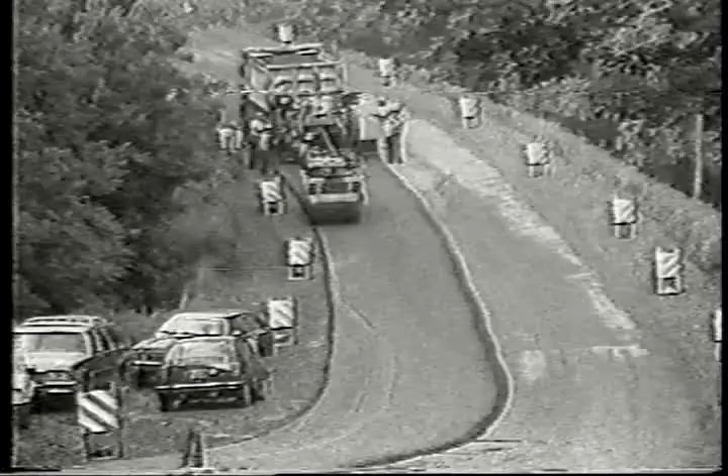In this program, I'll discuss two topics. One, the preliminary checks you'll have to make, and two, the equipment that's being used. In Part 2, I'll discuss preparing the area and tack coat operations. And Part 3 covers delivery of the hot mix, paving, compacting, constructing transverse joints, and acceptance tests.

There's one point I want to make right away. As with any other job, if it can't be done safely, don't do it at all. Watch for potential safety problems, and if you see one, get it corrected. Stop the work if necessary.

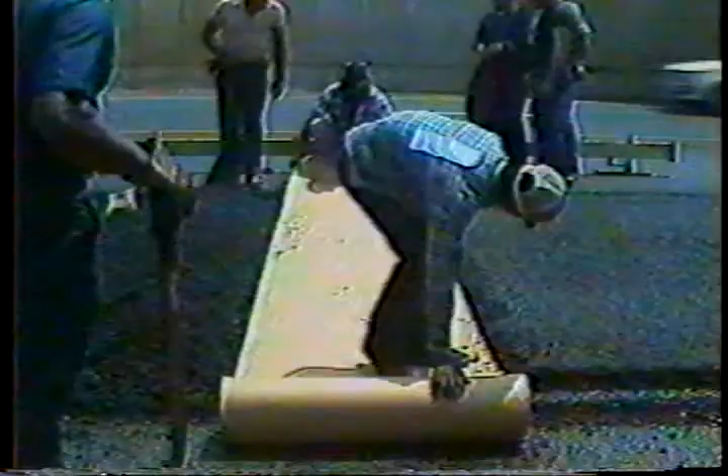Okay, let's get started. Preliminary checks. On any construction project, the quality is determined by three things: the materials, the equipment, and the work methods. Poor quality in any of these categories means a poor construction job. So really there's a fourth element at work here, the inspector. You have to know the materials, the equipment, and the work methods.

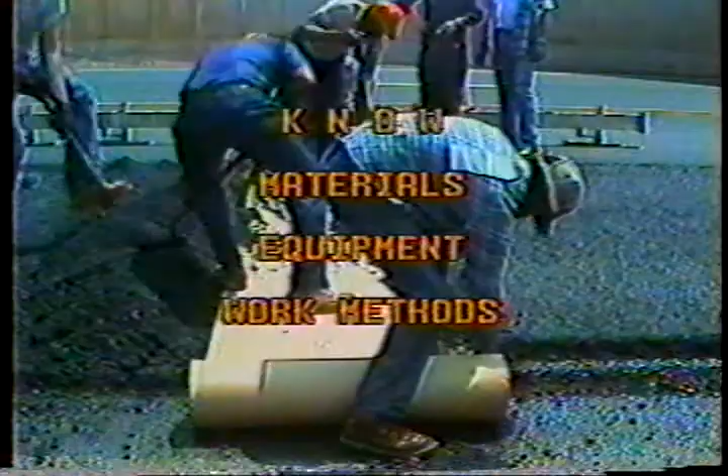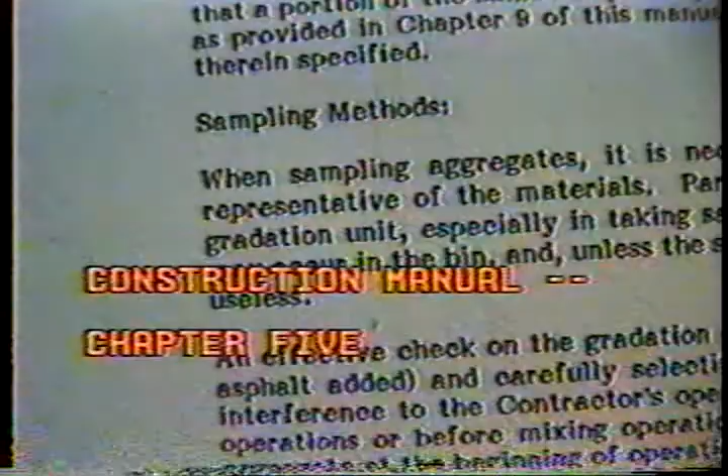For the most part, the work you'll inspect will be based on Section 5-04 of the standard specifications. Get a copy of the plans and the specs and read Chapter 5 of the construction manual. If you have any questions, ask your supervisor. It's better to get your questions answered beforehand rather than have the contractor ask you a question that you can't answer.

But the specs don't cover everything. There are always exceptions. So before any work begins, review the contract, including any special provisions and supplemental specs. Know each job before it begins. That's the only way to be fully prepared to do a good, thorough inspection.

Make sure everything's been approved: the material sources, the materials themselves, and the hot mix plant. That means, first of all, to make sure that all of the details have been covered in the pre-paving meeting between the contractor and the department. As for the material and the plant, you'll need to make sure that the job mix design is approved and the plant is approved according to the department's asphalt plant inspection checklist. I'll be talking more about the materials and work methods later on.

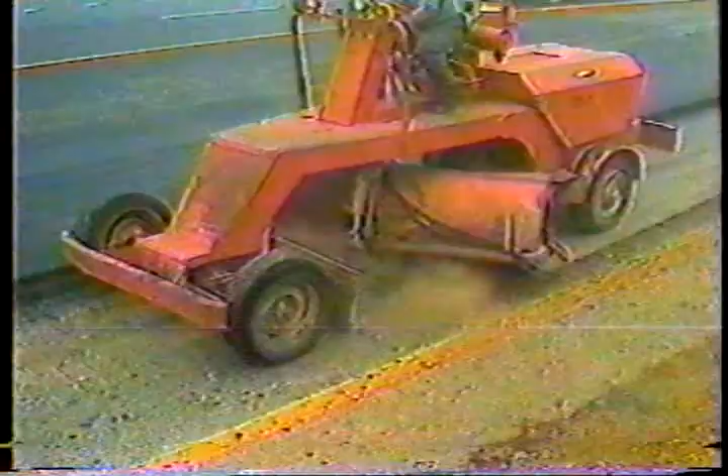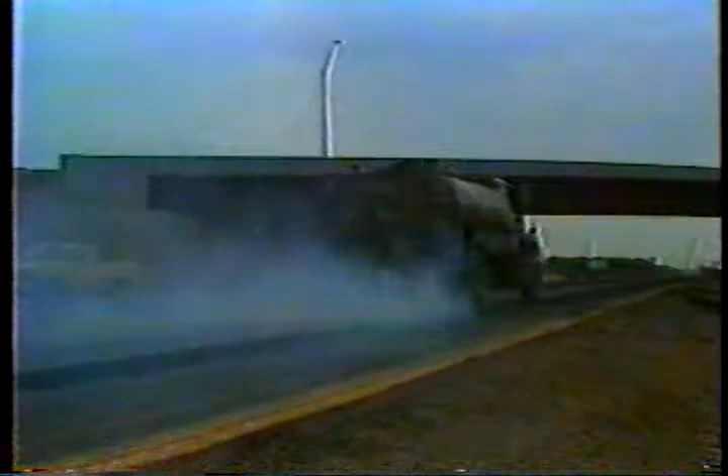Right now, I want to show you the equipment. The paving operation starts with some minor housekeeping. Power brooms and blowers to clean off the old pavement. A distributor applies a uniform coat of liquid bituminous material. There are haul trucks to bring the hot mix to the work site.

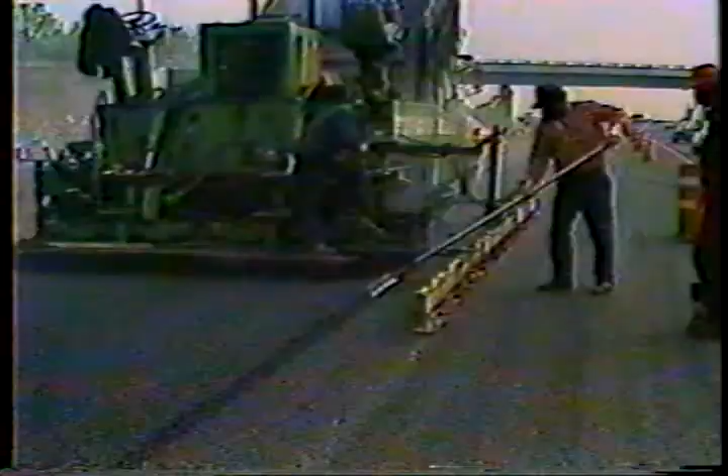And of course, the paver spreads the mix over the roadway, followed by rollers to compact it. And there are some miscellaneous hand tools, tampers, lutes, shovels, and so on. Let's look a bit more closely, starting with the distributor.

Distributors are really simple in some ways, and they're complicated in others. Basically, a distributor is just a storage tank on a truck with a pump and a spray bar that applies the oil, or it can be applied with a hand hose. You're most concerned with these points: the temperature of the bituminous material, the amount of oil being applied, and the coverage. It must be uniform.

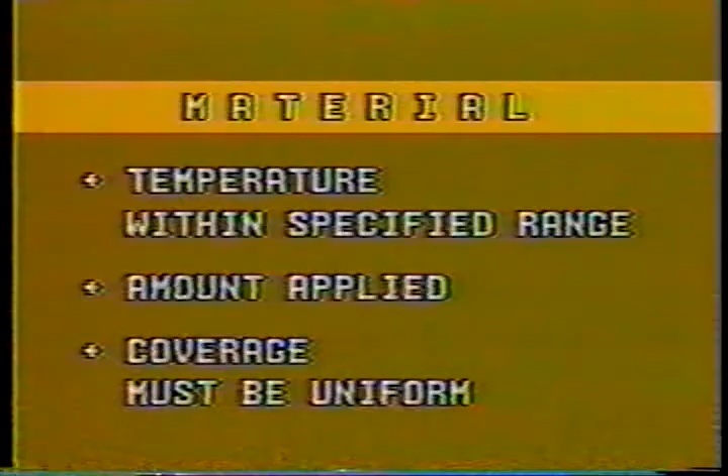The temperature of the oil has to be within a specified range, depending on the type of oil. The required temperature for each type is listed in the specs, so check the temperature in the book. And check the temperature in the tank. All distributors have a built-in thermometer, either on the top of the tank or in the side.

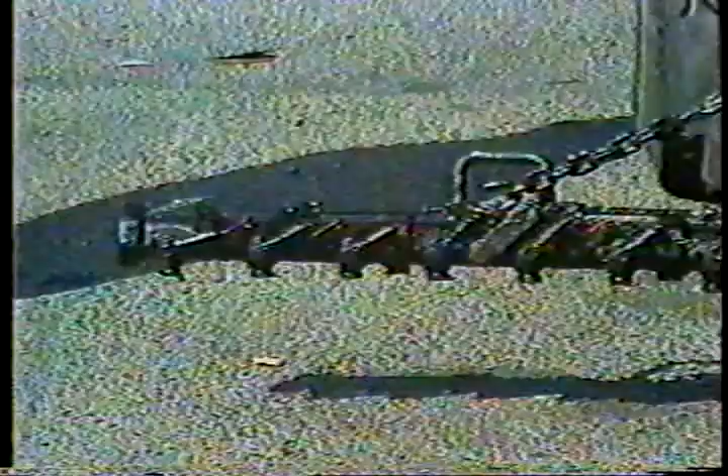In paving operations, the temperature has to be within the range listed in the specs. If it's below the range, get it heated. If it's above the range, reject it. The nozzles extending below the spray bar are precisely adjusted so that a uniform coverage of the material is applied. You should check all the nozzles. They all have to be the same size and angled in the same direction to get a uniform application.

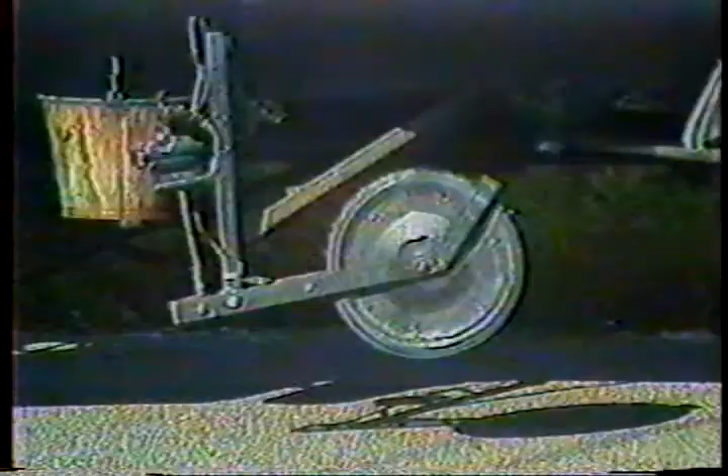The spray bar can be adjusted vertically. That way the amount of overlapping can be controlled, again to get a uniform coverage. When the distributor's pump pressure, the spray bar, and the nozzles have all been precisely adjusted, the distributor is said to be calibrated. To get the right application rate, the speed of the distributor is critical. In fact, the speed is so critical that it has to be measured in feet per minute instead of miles per hour. So all distributors have a small wheel that extends below the tank.

The wheel is connected to a special tachometer in the cab that measures feet per minute. If adjustments are necessary in order to get the correct application rate, the distributor operator can change the speed or the pump pressure or both. I'll be talking some more about the distributor and the application rate later on when we go over tack coat operations. Right now, let's take a look at the haul trucks.

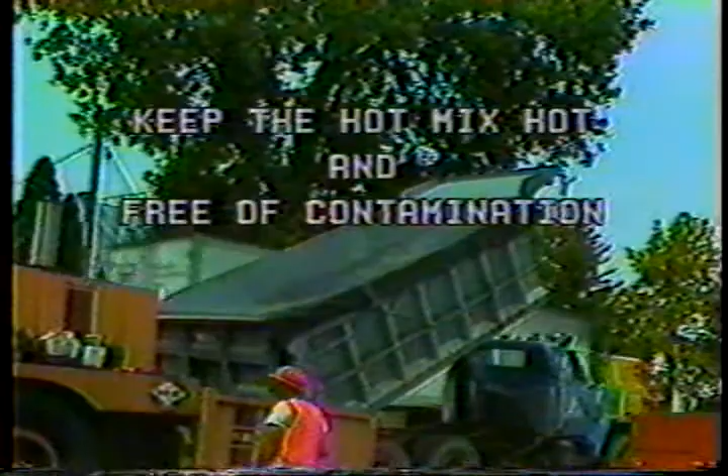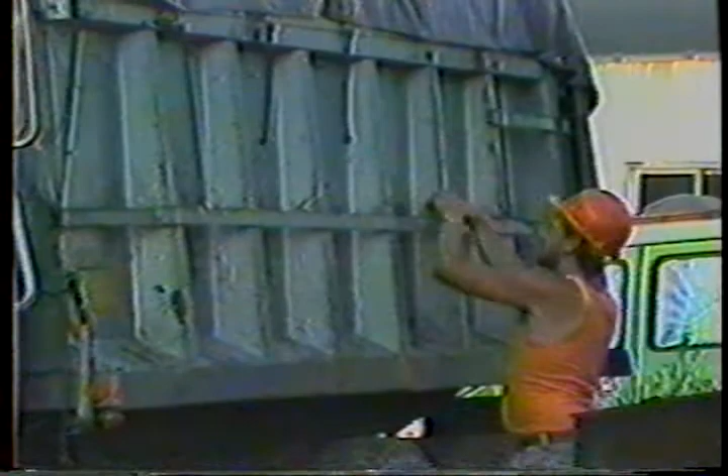Aside from getting the material to the job site, the most important functions of the haul trucks are to keep the hot mix hot and to keep it free of contamination. To do that, all trucks have to be equipped with covers. In cool weather or on long hauls, the covers have to be in place. And sometimes extra insulation may even be required to keep the temperature within that range.

It's important to keep the mix from sticking to the bed of the truck, so the contractor uses diesel fuel to lubricate the beds. But it's important to keep the mix from becoming contaminated, so make sure the diesel is drained off.

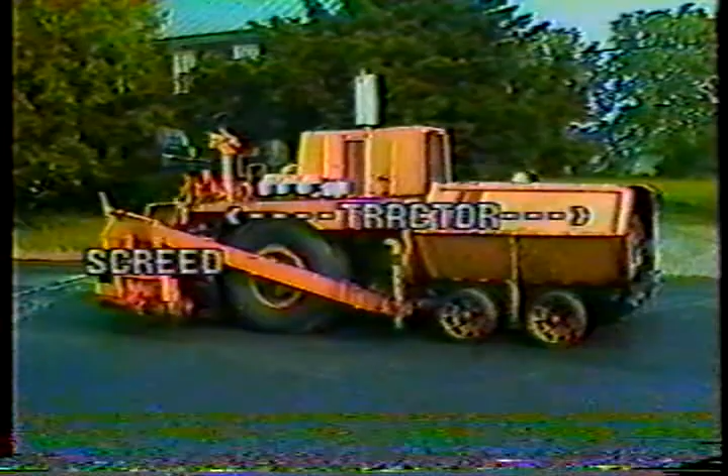Now, the paver. There are many types, but all pavers have two separate units, the tractor and the screed. The tractor's up front, and it's most of the machine. This portion, behind the tractor, is the screed. Let's have a closer look at the tractor. The tractor provides all the power for the paver. First of all, there are two push rollers on the front. The rollers push the haul truck along as the truck dumps the mix into the hopper.

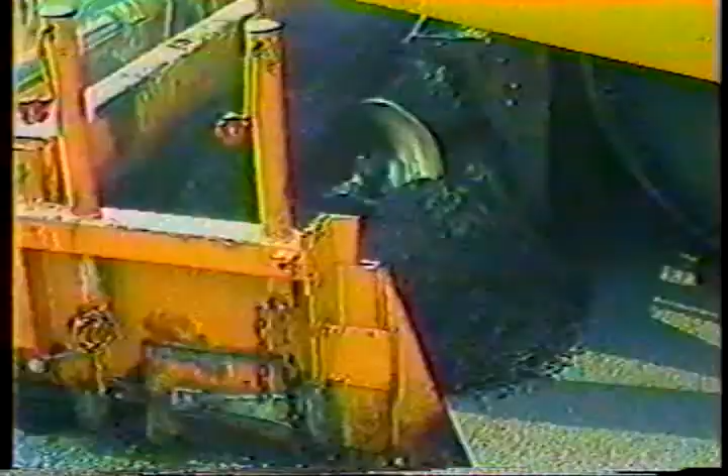Inside the hopper, two flight chains carry the mix through the tractor. The flow control gates over each chain are adjusted to allow the right amount of mix to pass through. As the mix comes out of the back of the tractor, it's placed evenly across the road by the auger. And that brings us to the screed unit. The screed acts independently and is pulled by the tractor. It strikes off the mix, and it partially compacts and smooths it.

Sometimes the contractor extends the screed so a wider area can be paved. There are two ways to do it, either by permanently attaching sections or with a hydraulic extension, sometimes called a hydraulic strike-off. Permanently attached sections can be used anywhere as long as they compact the mix in the same manner as the main screed. Strike-offs can be used only on the outside edge, in areas that would normally be luted in by hand labor. Never let the contractor use a strike-off in constructing longitudinal joints.

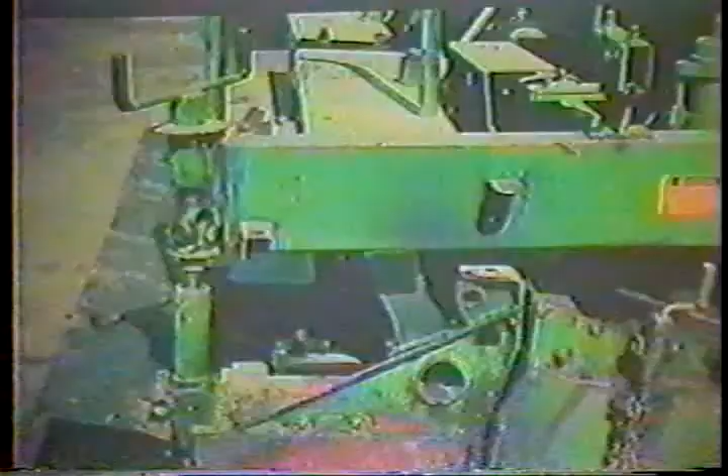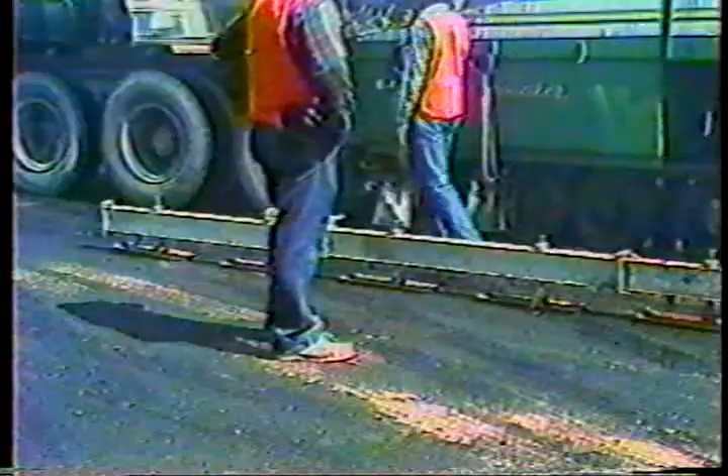The screed can also be manually adjusted with the screws on either side. That way, the screed can closely regulate the thickness of the mat. And that's important. Maintaining the proper grade and slope are critical in getting a quality pavement. So we require all pavers to be equipped with highly sensitive electronic devices for controlling both grade and slope.

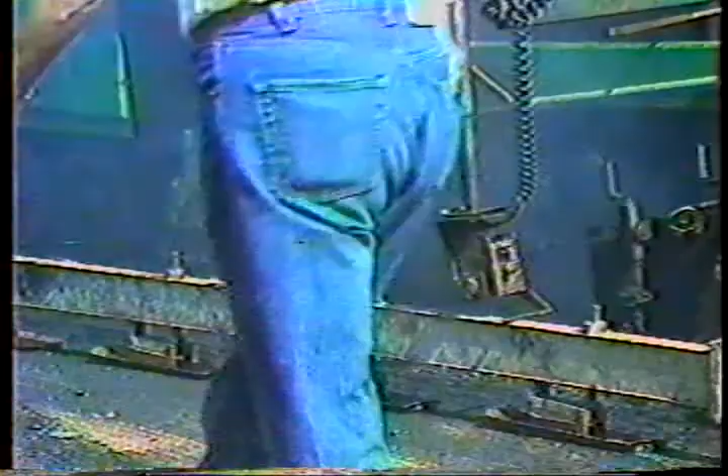On this paver, the grade is controlled with a sensing device on a long ski. The ski provides a moving reference for the sensing device. The sensor is located in a small box with an arm extending below it. The arm rests on the ski and detects bumps or sags in the surface. Then, through electronics, the screed is automatically raised or lowered to provide a smooth surface.

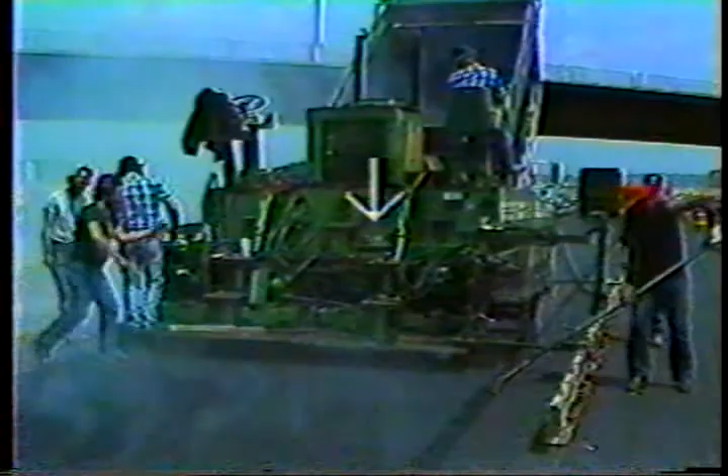The slope is controlled by a sensing device mounted on the screed and connected to the control box mounted on the tractor. The slope needed for the particular job is preset so that the sensor can continuously adjust the screed to maintain the proper slope. Of course, there's much more involved in both grade and slope control, but I'll cover them in more detail in Part 3 of the course. Now, though, let's look at the rollers.

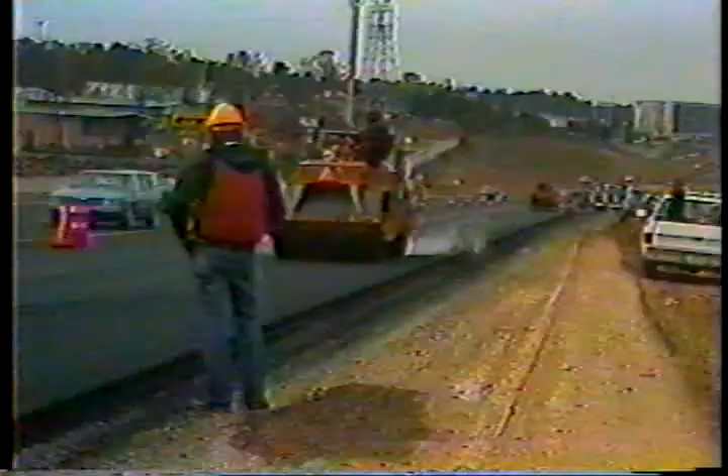There are many types of rollers, but most can be classified as vibratory, pneumatic, or steel-wheeled. All rollers are heavy, 10 tons or so on the average. And when you combine that kind of weight with a roller drum that vibrates, basically it's bouncing up and down on the hot mix, you're talking compaction. Each type of roller has its own function.

Vibratory rollers are used most often to provide the initial compaction. Pneumatic rollers are used primarily for the intermediate compaction. And steel-wheeled rollers come last. They give it the final touch. They smooth the pavement and eliminate the tire marks left by pneumatic rollers.

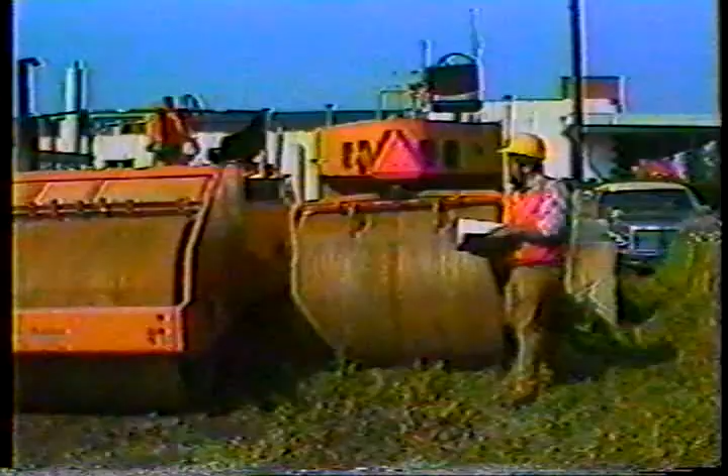The types of rollers to be used are up to the contractor, but regardless of the equipment on hand, the compaction listed in the specs has to be met, so the contractor needs enough rollers in good condition, operated properly to achieve compaction without damage to the mat.

Okay, now let's take a closer look at the inspection points on rollers, starting with steel wheel. There are 3 types: two-wheel, two-wheel vibratory, and three-wheel. The vibratory rollers can be operated either with or without vibration. The vibratory mode is used in the beginning of the rolling operation because it provides the most compaction. The static mode, that is, without vibration, allows the same roller to smooth out the pavement.

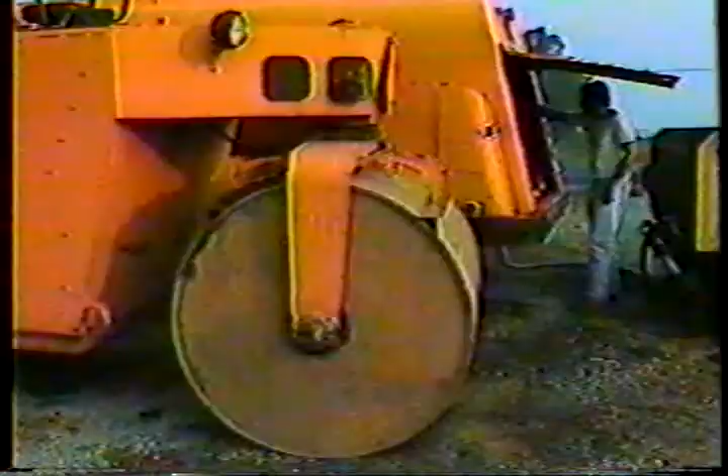On all steel-wheeled rollers, including vibratory rollers, there are some important inspection points. Here's what you should look for. First and foremost, check the drums. If they're not smooth, there's just no hope for a smooth pavement.

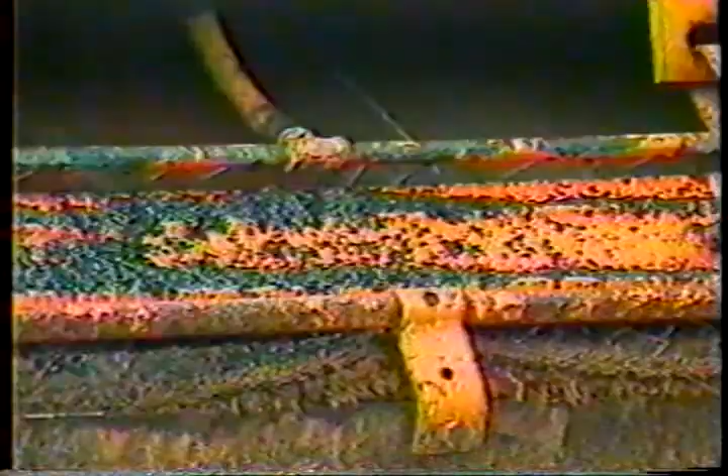All rollers have to have scrapers and mats to remove any material that's been picked up. The wheels tend to pick up some of the hot mix, and if it's not scraped off, it can ruin the surface. For the same reason, the wheels have to be kept moist, so make sure all the nozzles are working.

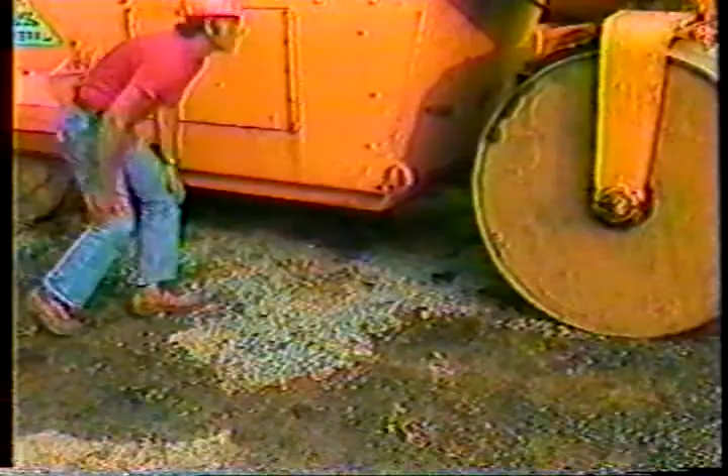And finally, check under the roller. Make sure there are no oil or fuel leaks. Either kind of leakage will contaminate the hot mix. They're both solvents. They'll break down the asphalt. And that covers steel wheel rollers.

Now, pneumatic rollers. The first things you should look for are scrapers and mats over the tires to remove any material that's been picked up. Each of the tires.

One more thing about rollers. All rollers have to be the right weight for the job. Using a 2-ton roller on a regular paving job would be much like driving railroad spikes with a tack hammer. You have to have the right equipment.

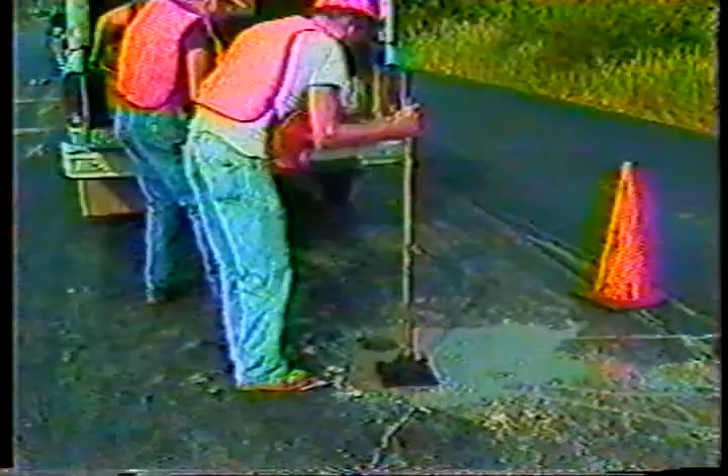Okay, now let's have a look at the hand tools. The most common are manual tampers, mechanical tampers, lutes, and shovels. Tampers are used to compact the material in places that the rollers can't reach. Keep in mind, though, that you want the most compaction you can get, so be sure mechanical tampers are used in place of manual tampers whenever possible. And of course, no tampers should be used if a roller can reach the material.

Lutes are used primarily in constructing longitudinal and transverse joints. The important thing here is to make sure the contractor uses lutes, not rakes. Rakes are shaped differently and cause segregation. They simply will not do the job properly.

Just one more point about hand tools. They won't work well unless they're kept clean. And it's the cleaning material you need to be concerned with. It's a solvent. A lot of contractors use diesel fuel. And if it'll dissolve hot mix on the hand tools, it'll dissolve hot mix on the pavement. So make sure that all cleaning material is kept well away from the mat.

And that brings us to the end of the program, preparations and equipment. In Part 2, we'll go into tack coat operations.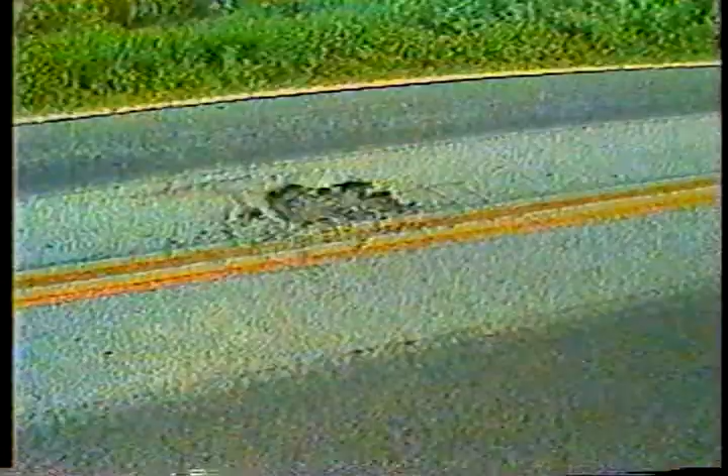It would be a waste of time and money to resurface a road that needs major repairs. If we were to pave over this pothole, it would reappear in the new pavement. Resurfacing doesn't repair potholes, patching repairs potholes. Edge failures fall into the same category. They have to be patched before paving begins.

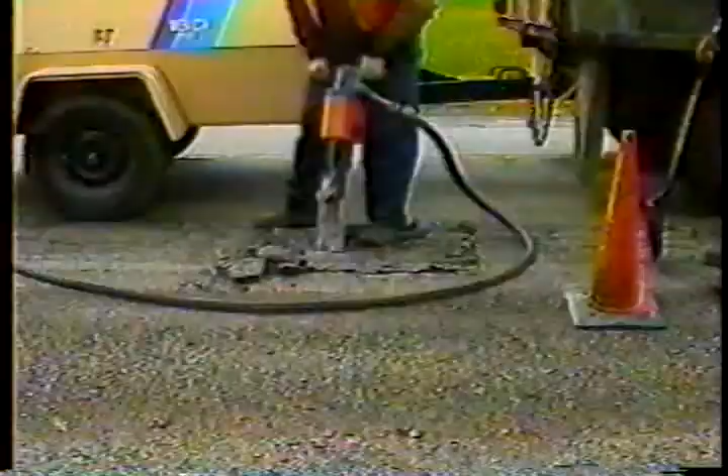Patching's basically a matter of marking off the area, excavating down to a solid base, applying a tack coat for a good bond just like in paving, filling the hole in layers with new mix, and compacting it, again just like paving. But my purpose here is not to show you how to patch a pothole. I'm just saying make sure it gets done beforehand.

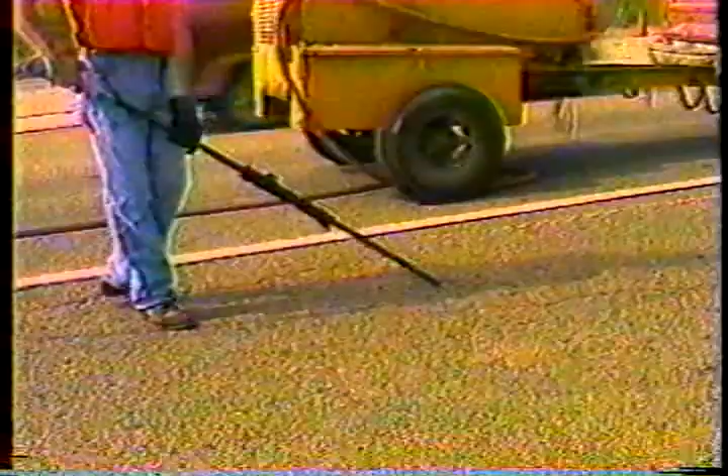Cracking is another problem that has to be cleared up. Small cracks don't matter because the new pavement will cover them, but large cracks need to be sealed before paving can begin. Again, my purpose here is not to show you how to make the repairs, just to make sure they're made beforehand. Now for the tack coat.

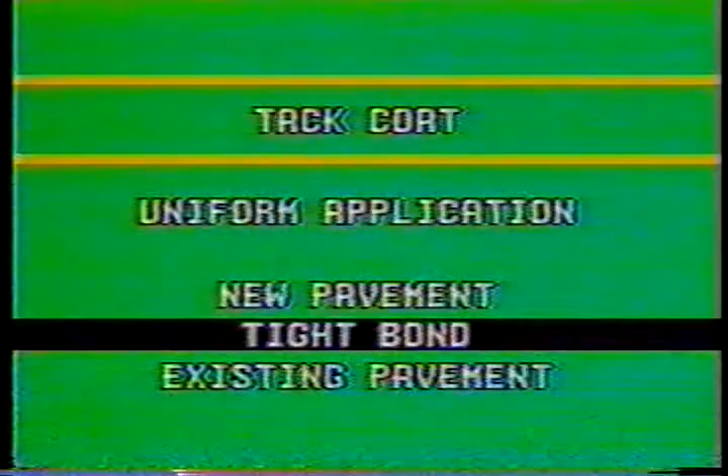The whole purpose of the tack coat is to get a uniform application of oil on the pavement, to get a tight bond between the new pavement and the existing pavement. And the only way you can get a good bond is when the surface to be tacked is both clean and dry.

So make sure that the contractor thoroughly cleans the surface with a power broom and a blower so that all dirt, dust, and other foreign material is removed. If there's a coating of dust, the oil will bond to the dust, not to the old pavement, and that's just no good. So, clean and dry.

Now, inspecting the material. Asphalt cement is the material used in the tack coat to make the bond. It's your responsibility to ensure that the right type of material is delivered to the job and that it's heated to the right temperature.

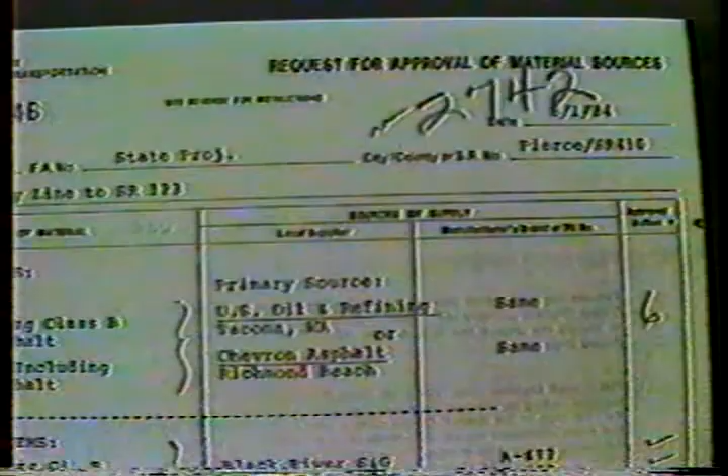So the first thing you should do is verify that the asphalt cement is from an approved source. The Request for Approval of Source form lists all of the approved sources. And check the type of material on the delivery ticket, each load. For tack coats, it should generally be CSS-1.

Check the temperature. Make sure that the temperature is within the range listed in the specs. And double check the temperature just before the tack coat is applied. If it's below the range in the specs, have the contractor heat it up. If it's over the range, reject it.

Okay, now you should discuss the application requirements with the driver and the foreman. Check the specs to find the required application rates for the tack coat in gallons per square yard. The application rate varies depending on the type of mix being placed, so refer to the table if you're not sure of the proper application rate.

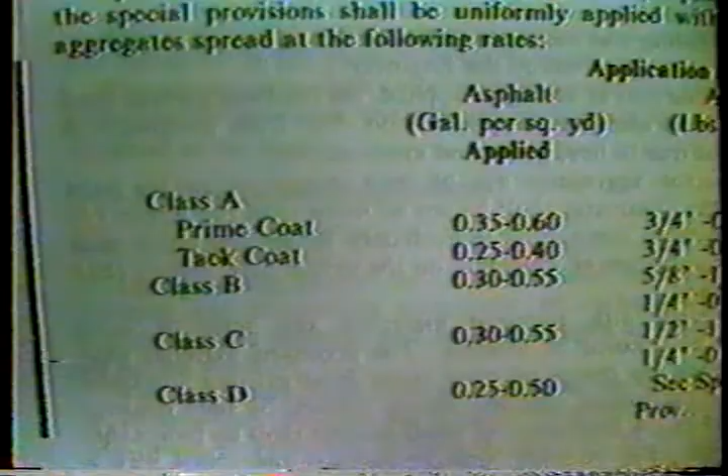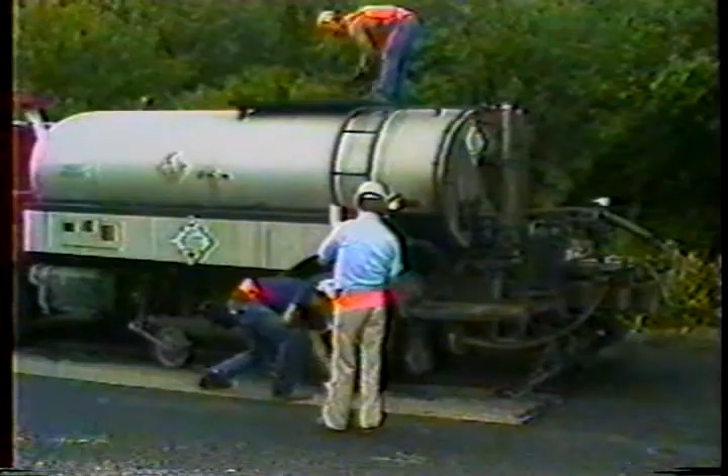Once you know how much material has to be applied, the driver can determine the correct pump pressure and the speed at which to run the distributor. All distributors have volume gauges which show the application rate as the distributor is moving. But the only way to make sure the application is correct is by running a shot check. It's a fairly simple procedure.

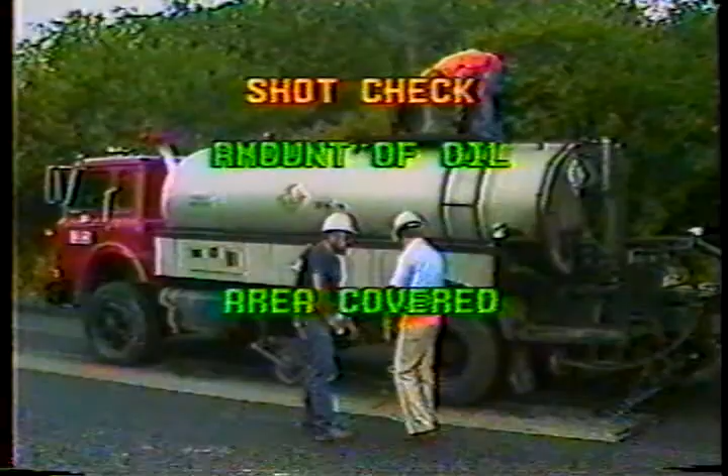Let's go through it. Basically, you need to know two things: the amount of oil that was applied and the area that was covered. So you need to know the beginning station and the ending station, and you need to record the distributor's volume gauge before and after the shot. Subtract the smaller numbers from the larger numbers to get the distance covered and the volume of asphalt cement used.

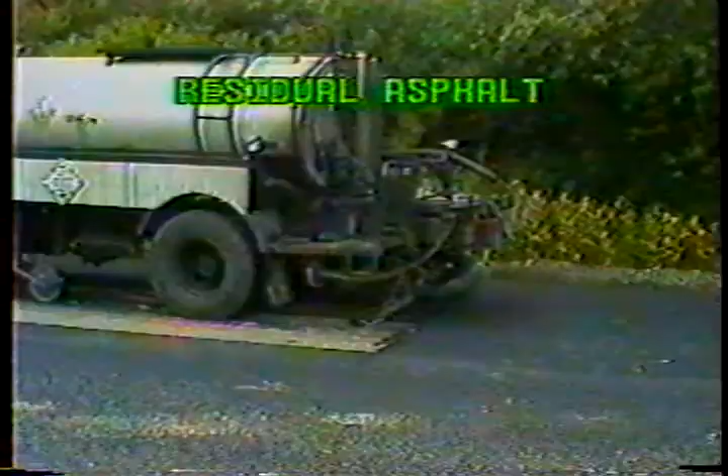Multiply the length of the shot by the width to get the square feet of coverage, and divide by 9 to convert square feet to square yards. Here we have 95 gallons used over 1,333 square yards. That's the total application rate, but it doesn't account for the water mixed in with the asphalt cement. What we're concerned with is the residual asphalt, the amount that's left after evaporation. So some more calculations are needed. Your instructor will go through them at the end of the program.

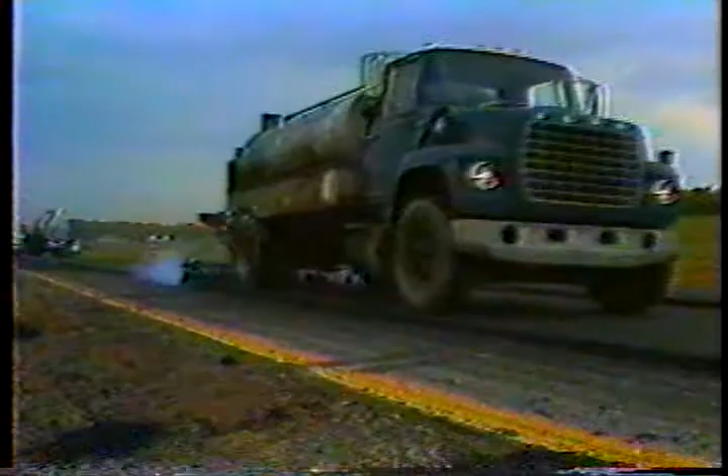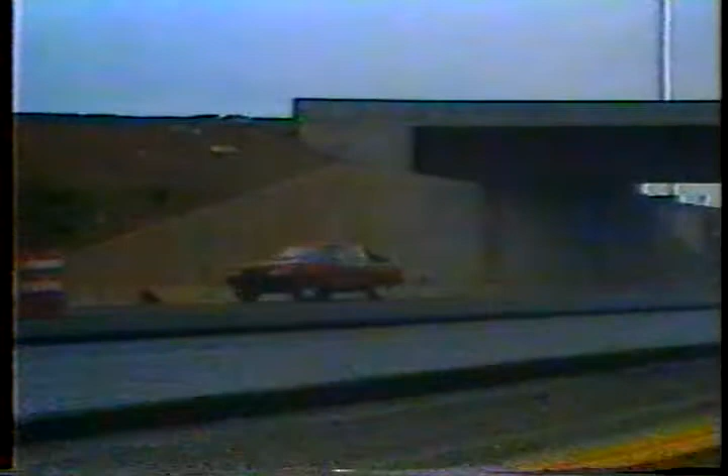Verifying that you're getting the correct application rate is just part of the job. Inspecting the tack coat visually is just as important. You can have the correct application rate and still have a poor tack coat. This is what it should look like: a smooth, even, uniform coverage. Look closely at the application. If you see any bare spots or lightly covered areas, stop the distributor operator and get the problem corrected. It could be just one plugged or misaligned nozzle. And of course, if there are bare spots, make sure more tack is applied.

As you can see here, putting down too much tack is as bad as not enough. It can bleed up through the new pavement, causing a slick surface. So if you see any puddles, have the contractor shovel off the excess material. But of course, correcting these problems can be difficult, so stop the distributor as soon as you notice anything wrong. Get the problem corrected right away.

Make sure the vertical edge of curbs, gutters, manholes, and other raised surfaces are tacked. The pavement has to bond there too. That's where the hand hose comes in. And it's really the only use for the hand hose. Make sure the hand hose is never used in broad areas as a substitute for the spray bar.

One last thing about the tack coat: don't let the contractor apply more tack than he can cover with the paver the same day, or in an hour or two if the weather is questionable. A tack-coated surface is very slippery, and traffic should be kept off until no hazardous conditions exist.

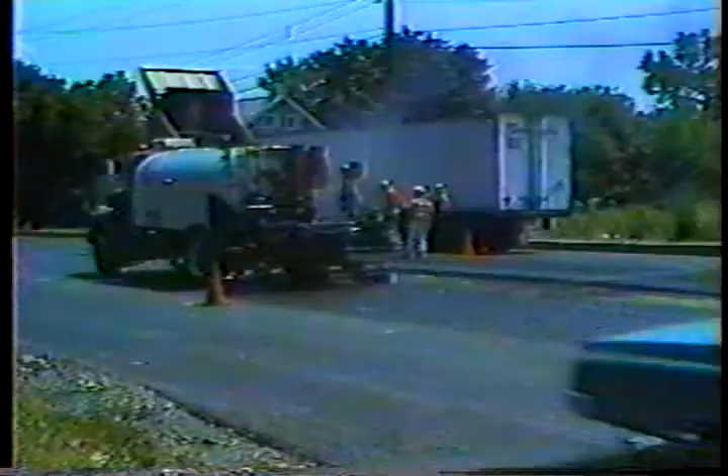And that's it for the tack coat. We've come to the end of part 2 of bituminous concrete paving. Next, the paving operation itself.

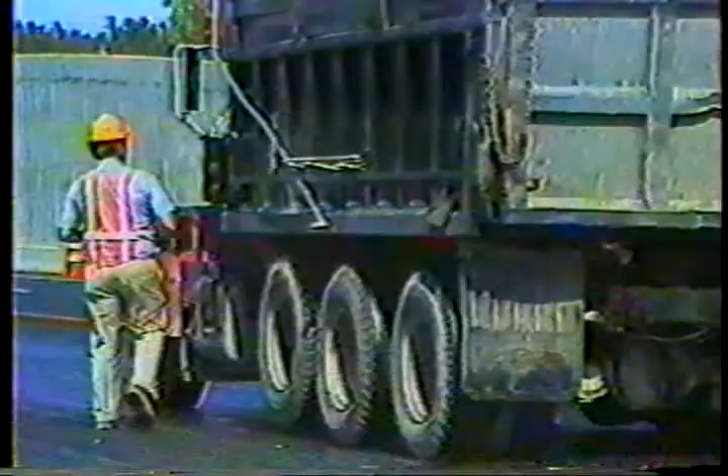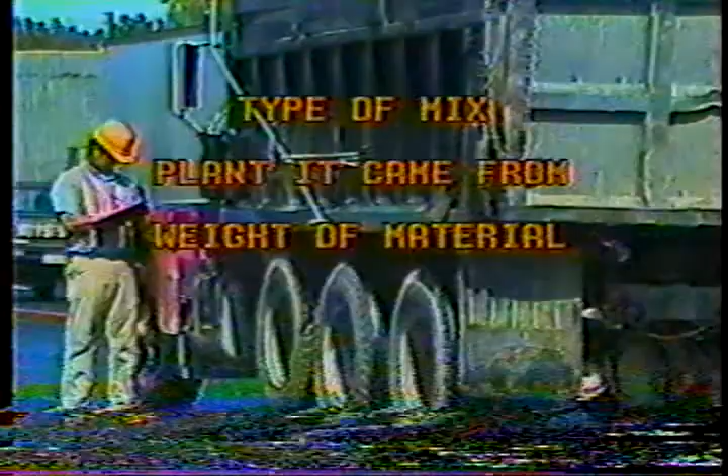The first thing to do is collect the delivery slip from each haul truck. The ticket tells you the type of mix, the plant it came from, the weight of the material, the time the truck left the plant, and the project number. You'll also need the mix design. Don't let the contractor start paving until you have it. Normally, there's only one per job for each class of mix.

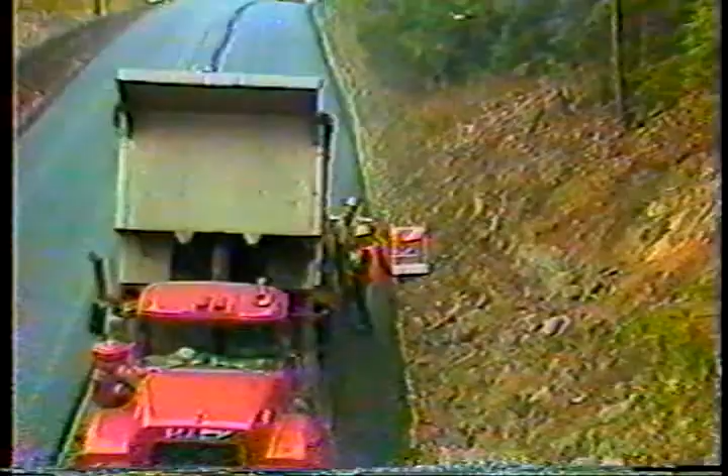The specs tell you what the mix temperature has to be. Check and record the mix temperature. If it's outside the range in the specs, reject the load. Look over the mix in each truck as it loads the paver. Look for blue smoke, steam, and lumps. These are indications that the mix is too hot or too cold.

If the mix looks soupy, stiff, or dull, there's either too much asphalt or not enough. Pockets of fines or pockets of coarse aggregate indicate segregation. These are also reasons to reject the load. Let the plant technician, the contractor, and your supervisor know immediately if you see anything that doesn't look right.

One more thing about delivery of the hot mix. The only way to get the best pavement is through a continuous operation. You don't want too few or too many trucks arriving at the job site. If there aren't enough trucks, the new pavement will cool off, and if there are too many, the mix in the trucks will cool off. Either way, it's no good.

The only way you can get good compaction is when the mix is hot. So if a truck's been waiting for a while, double check the temperature and tell the contractor to adjust the operations.

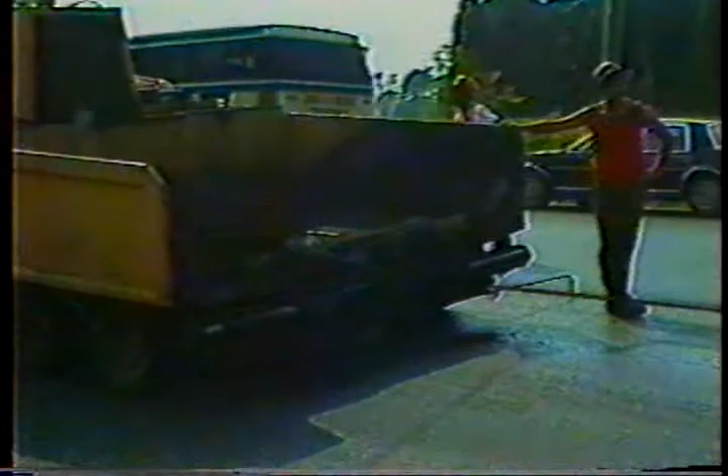Now paving can begin. First, the haul truck backs up to meet the paver. Make sure it's done smoothly and evenly. If only one roller makes contact, or if the truck bumps the paver, the mat will be distorted. The haul truck begins to load the paver as the paver pushes the truck. Make sure the truck and the paver work closely together to avoid dumping mix outside the hopper.

If you see material spilled ahead of the paver, make sure it's shoveled up so the tractor won't run over it. Make sure none of the mix sticks to the side of the hopper. If the mix cools down and drops in later, it won't compact.

As the mix is placed, there are several things you should be looking for. As I said, continuous operation, but also the overall quality of the mat, the loose depth of the mat, the outside edge of the pavement, the longitudinal joint, and the controls for maintaining proper grade and slope.

As for the overall quality of the mat, you should check to be sure that it's smooth, uniform, and free of blemishes. If it's not, something is wrong with the paver or the mix. And look closely again for segregation. If the texture of the mat isn't uniform, the mix is segregated. Let the contractor know right away.

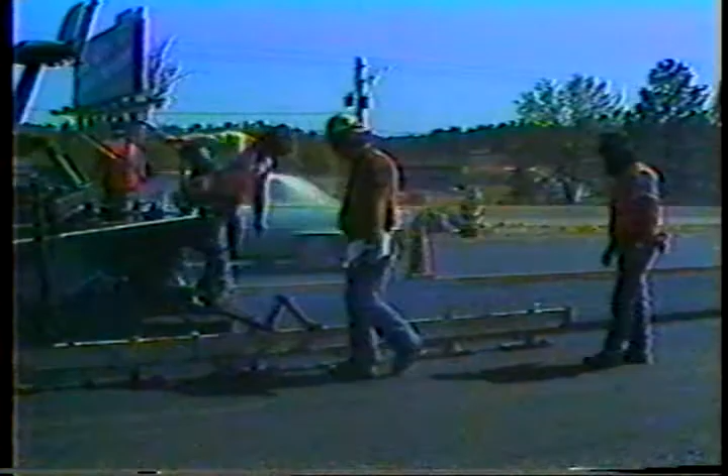Throughout the paving operation, the contractor makes several loose depth checks using a depth gauge. The depth checks let you know if the right amount of mix is being placed. A general rule of thumb is that the mix will compact 1/4 inch for every 1 inch of mix being placed. So as an example, if the final mat is supposed to be 3 inches thick, the loose depth should be about 4 inches. 1/4 inch compaction for every 1 inch of loose mix.

Next, check the edges of the new mat. Any exposed edge has to be vertical. If it has sheared or torn off, get it repaired. Before any additional lanes can be placed, the longitudinal joint has to be tacked. It can be tacked with the hand hose or covered by the distributor. Both methods are acceptable, but the hand hose usually works best.

Then, after tacking, the second lane can be paved. The paver is lined up so that there's a slight overlap into the first lane. Immediately after the paver goes by, the coarse aggregate is luted onto the fresh mat away from the overlap. The coarse aggregate should not be compacted into the cold pavement, so make sure the luting is done before the roller gets there. That way the finer portion of the mix will be compacted into the joint. The idea is to tightly seal and compress the longitudinal joint so that water can't get in and ruin the pavement.

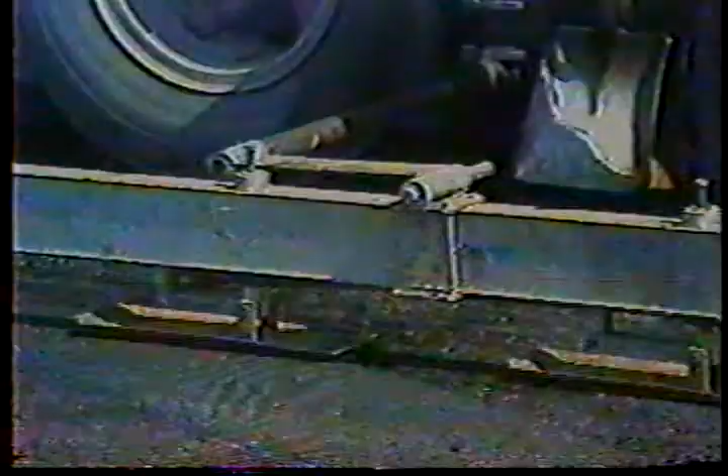First of all, the ski has to be at least 30 feet long. In many cases, the ski sections are 10 feet long, so it's easy to see whether the ski meets this requirement. Just count the sections. But of course, if you're not sure, measure it. Next, make sure the sensing device is mounted near the center of the ski. The sensor averages the humps and sags over the length of the ski, and it won't be accurate unless it's mounted near the center. The electronic device must also be sensitive if it's going to be accurate.

Here's how you check it. The paver has to be stopped. If you do this check while the paver is moving, the mat will become uneven. So the best time to do it is while the paver's waiting for a haul truck. Now all you have to do is insert a key or some other small object between the arm extending below the sensor and the ski.

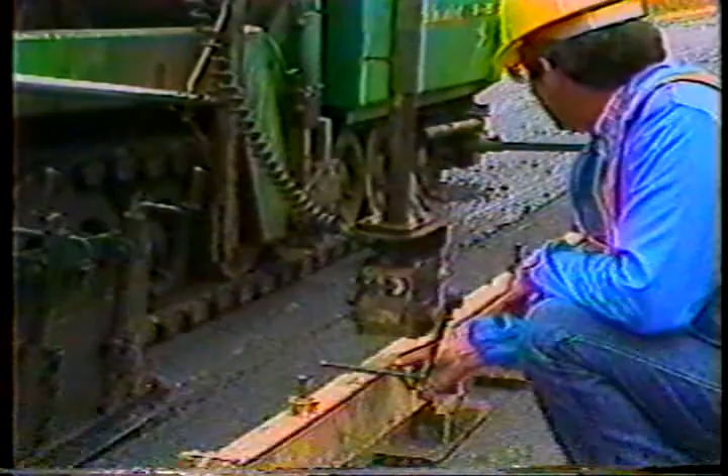If the hydraulic ram moves slightly and the needle on the gauge swings to one side, the device is sensitive. If the ram doesn't move, the sensor is not working. Have the contractor repair the equipment before continuing.

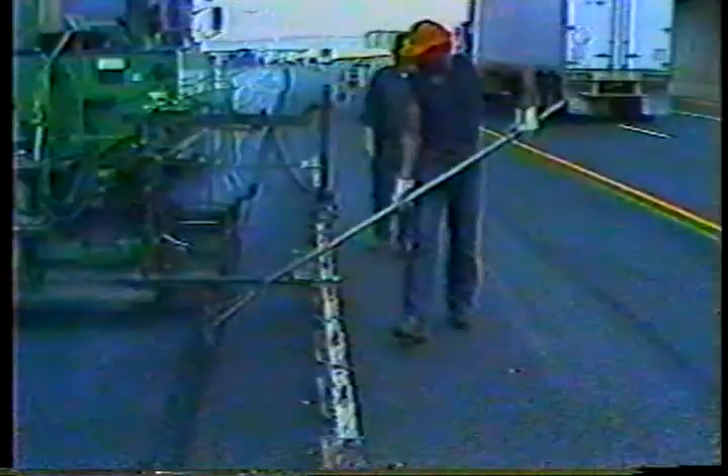Now, as I said earlier, the ski has to be at least 30 feet long, but there are a few more requirements. It has to pull straight while remaining parallel to the longitudinal joint, and it has to be free to float on the surface. Here's how to check it. This time, the paver has to be moving. You can tell whether it's pulling straight and remaining parallel to the joint just by looking at it.

To check whether the ski is floating freely, just lift up on each shoe as the paver goes by. Each one should move freely. Now that makes sense. If the shoes were stuck, the ski and the screed would be continuously raising and lowering. And of course, the whole idea is to end up with a smooth surface. Well, that's basically what's involved in checking grade control.

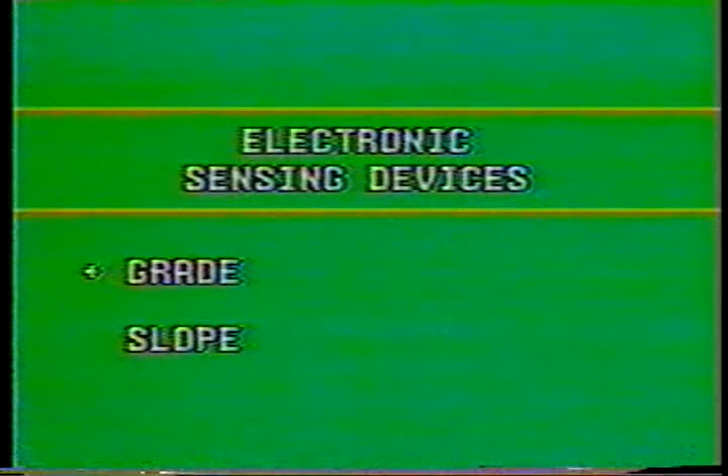Now let's have a look at controlling the slope. You'll remember from part 1 that the sensing device for slope control is attached to the screed. The required slope for the job is preset, and the sensor adjusts the screed to maintain the proper slope. There are really only 2 ways to be sure the sensor is working properly. One way is to just look at the gauge on the sensor. If the needle is swinging slightly, you'll know that the sensor is at least noticing changes in the slope.

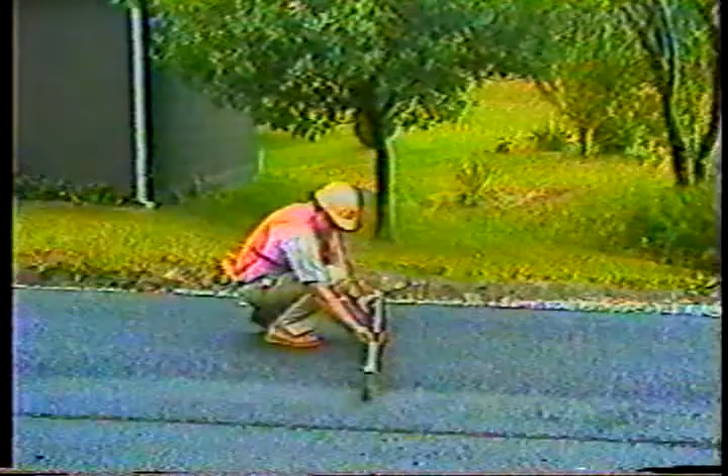But the best way to check the slope is to use a template. And not just any template, you'll need one that's shaped the same as the specified slope. That way the bubble in the template will read level when the surface has the correct slope. All you have to do is check the surface with the template every few feet. Okay, that's it for paving.

Now, compaction. There are 3 phases of compaction: breakdown, intermediate, and finish. The breakdown phase does most of the compaction, so make sure the roller follows as soon as possible behind the paver. If the mix is allowed to cool, it won't compact properly. Intermediate rolling follows right away. The intermediate phase gives the mix its final compaction and is followed by finish rolling. Finish rolling smooths the mat and eliminates any roller marks left from the previous rolling.

Let's look at the rolling pattern, beginning with the breakdown phase. When the first lane is placed, the roller starts at the side of the pavement, then makes successive passes, overlapping each pass 6 to 12 inches toward the longitudinal joint. When the second lane is placed, rolling starts at the joint, and the procedure for rolling the joint depends on the type of roller being used.

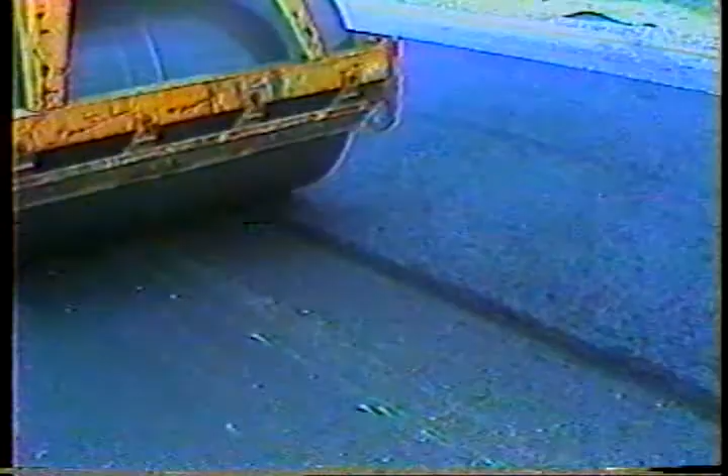If the roller is operated in the static mode, the first pass is made in the cold lane, as you see here, and it overlaps the longitudinal joint by 6 inches. If the roller is operating in the vibratory mode, it's the opposite. The first pass is made in the fresh mat and overlaps the longitudinal joint 1 or 2 inches.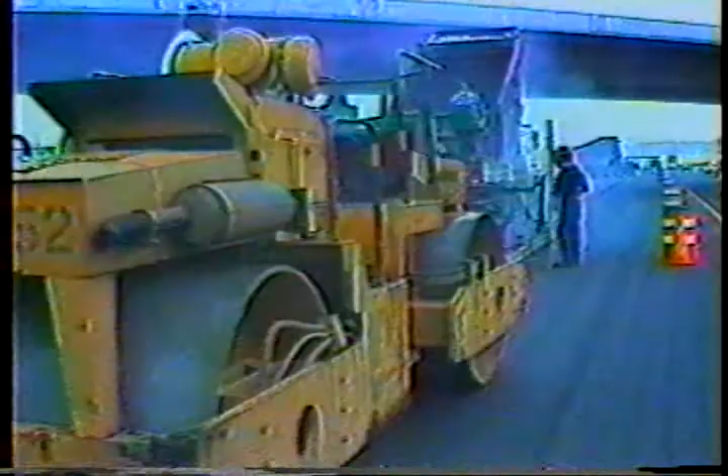Next, the outside edge of the pavement is rolled. Rolling continues toward the longitudinal joint, each pass overlapping 6 to 12 inches. So that's the procedure. Pinch the joint first, then move to the outside edge and continue rolling back toward the longitudinal joint.

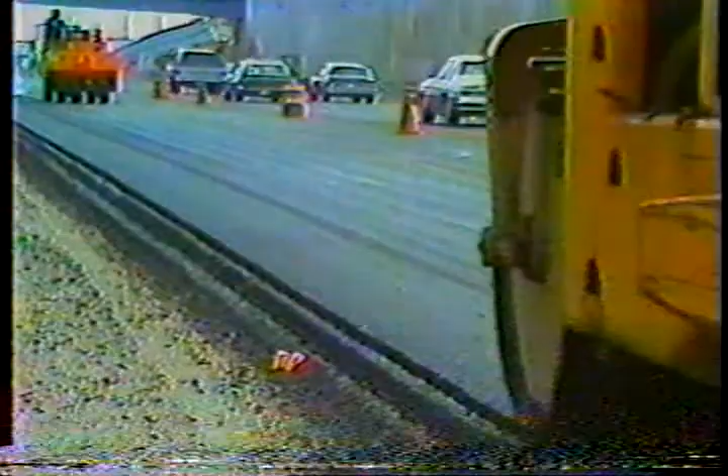Okay, now let's look at intermediate rolling. Intermediate rolling is normally done by a pneumatic roller. The pneumatic roller continues until final density is achieved. As soon as intermediate rolling is complete, finish rolling begins. The finish rollers continue until the pavement is smooth and the wheel marks have been eliminated.

And there are some speed limits to enforce: 3 miles per hour for vibratory rollers in the vibratory mode, 4 miles per hour for steel rollers or vibratory rollers in the static mode, and 5 for pneumatic rollers.

Final density should be achieved before the internal temperature of the mat drops below 185 degrees Fahrenheit. If it does drop below 185, the contractor can keep rolling as usual, but if it goes below 175, not with a roller in the vibratory mode, because that could break down the asphalt cement.

There are a couple of things you'll need to check throughout all phases of the rolling operation. First off, look over the mat closely. If you see any loose material that can't be compacted, make sure it's removed, replaced, and recompacted. And second, be sure to watch each roller closely as it reverses directions. It has to be done smoothly. Don't let them scuff, mar, or push the mat. They should start, stop, and turn smoothly.

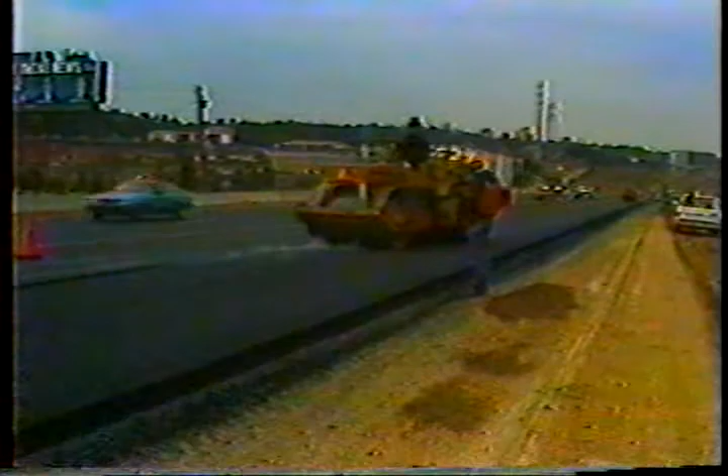There's one special case in rolling: super elevations. With super elevations, rolling always starts on the low side. Successive passes overlap 6 to 12 inches toward the high side, and that's the only difference: low side to high side.

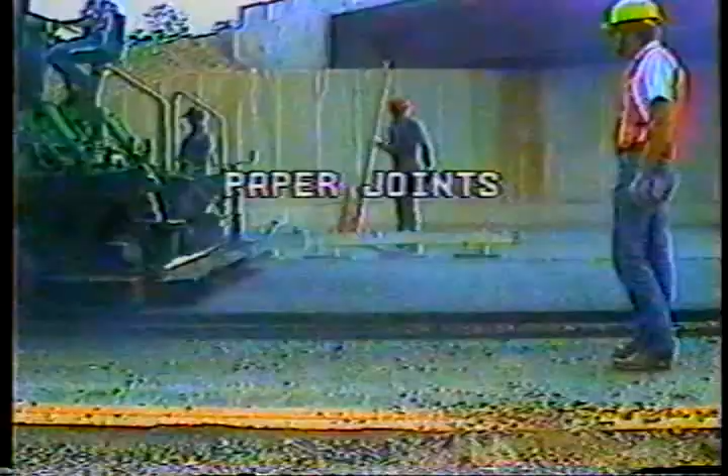Now constructing paper joints. They're made whenever the contractor stops work at the end of the day or when he stops because of problems. Here's how it's done. The paver continues to place the mix as long as it can place the correct thickness. Then the feeders are stopped and the screed is raised. The mat will then be uneven.

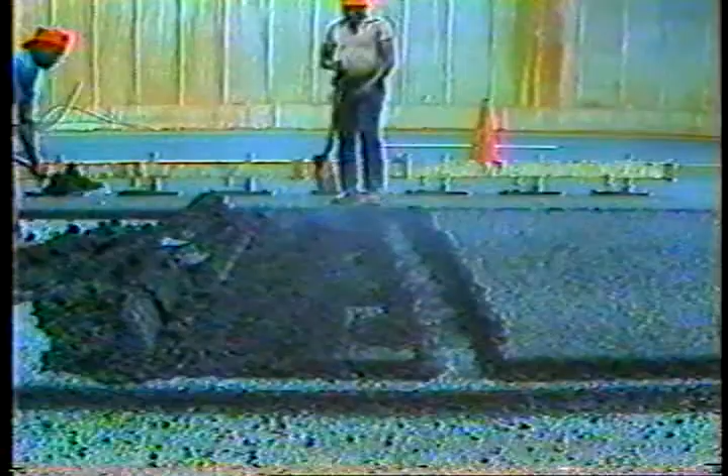The next step is to dig a furrow through the mat. Be sure the furrow is well away from the uneven mat, though, because this is where the paving will begin again. Once the furrow has been dug, the excess material can be moved away to make room for the paper, and then the joint is luted to give it a vertical face.

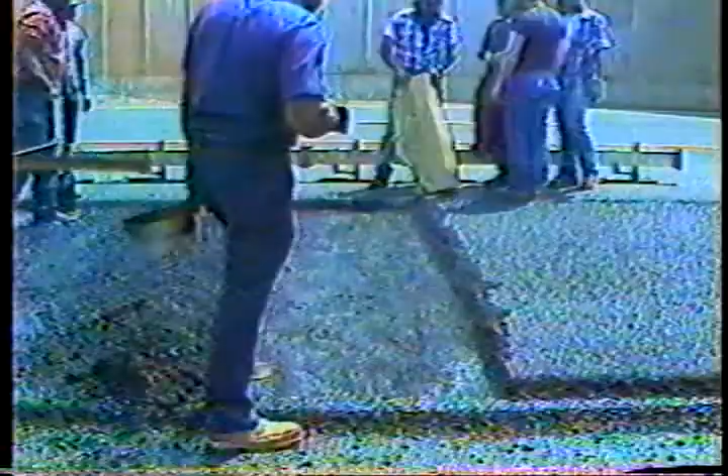When the luting is complete, the paper is rolled across the old surface next to the joint. Be sure the paper extends up the face of the joint. Now the paper is covered with the hot mix that was moved away from the joint, and it's luted. All of this material would be wasted, but it serves an important function. It provides the necessary support for the joint. If the joint were not constructed like this, it would crumble when it's rolled.

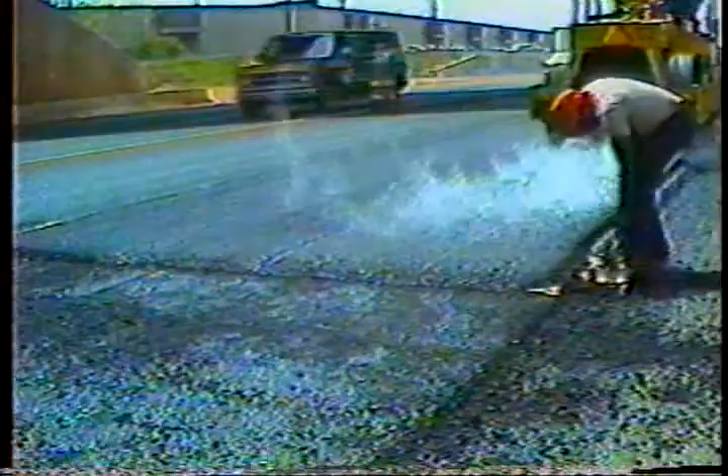And that brings us to the next step, compaction. The breakdown roller, of course, comes first, but make sure the joint gets the same compaction as the rest of the mat. That includes pneumatic and finish rollers. The joint has to be straightedged, too. You can't make a good joint out of a bad joint.

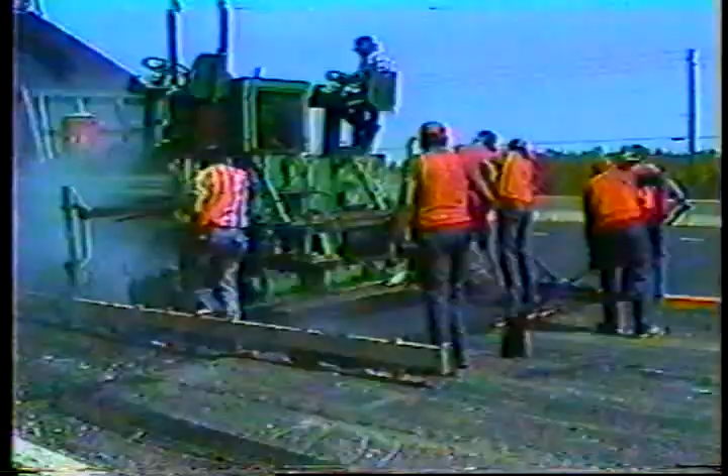When paving begins again, here's the procedure. First, all the paper and excess material are removed. Once the excess material is removed, the face of the joint is tacked. Then the paver backs up a few inches over the joint and begins paving. Make sure the material is luted away from the joint onto the fresh mat. Fresh material can be compacted only in the fresh mat. Now the joint can be compacted.

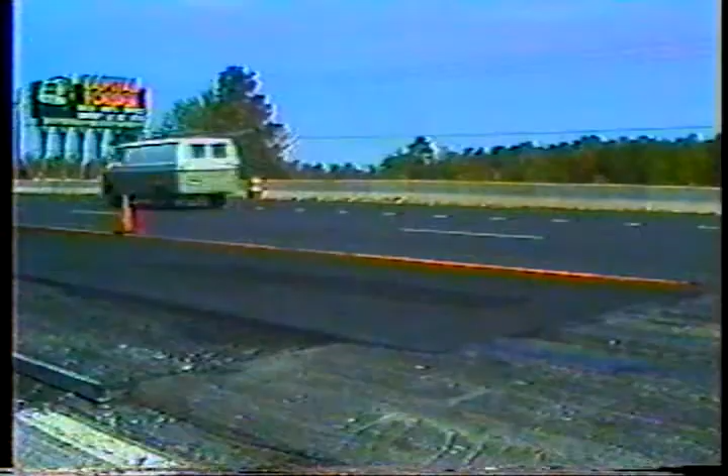The transition to the new mat has to be as smooth as possible. Any irregularity in excess of 1/8 of an inch in 10 feet has to be corrected immediately. So be sure to check the joint right away with a 10-foot straightedge, and of course have the contractor repair any humps or sags greater than 1/8 of an inch. And that's the procedure for paper joint construction.

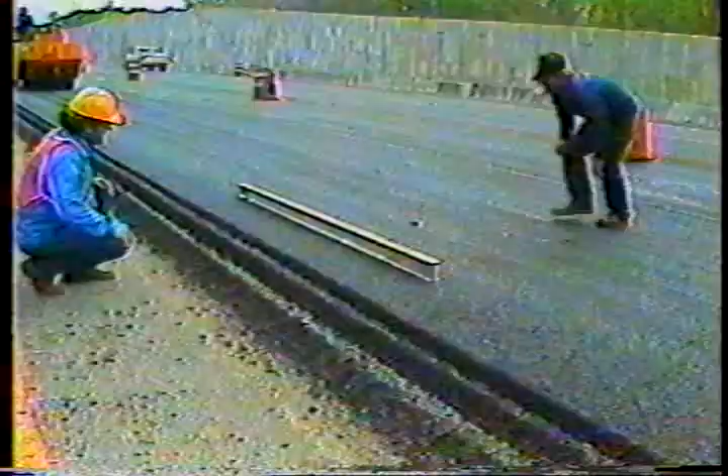Now let's look at the last item on the list, acceptance. To put it simply, a project can be accepted only when quality mix is spread smoothly at the required depth and compacted to the proper density. We've already talked about inspecting the mix when it arrives at the job site and checking the grade and slope of the pavement for smoothness. But there's one more check you'll have to make for smoothness. After the finish rolling is complete, eyeball the mat. If you suspect a problem,